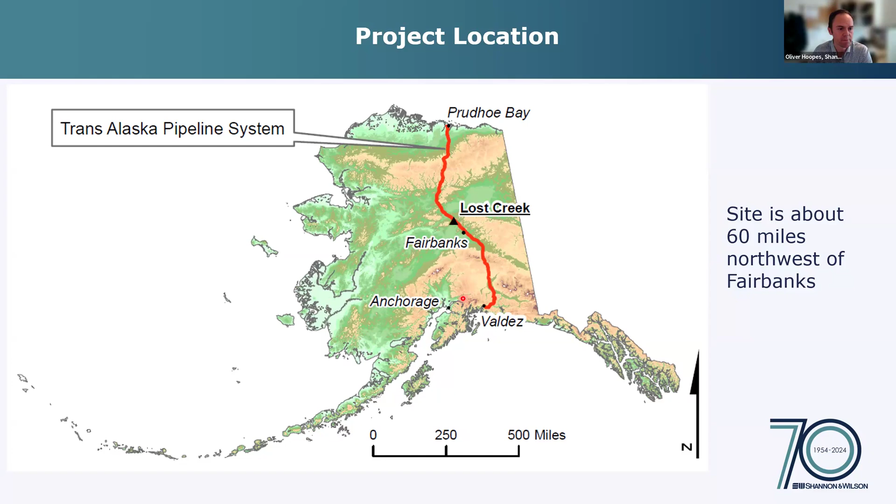Just a really quick overview of TAPS. Most of you probably know this, but I'll summarize it anyway. It's an 800-mile pipeline. It goes from Prudhoe Bay, the very north of Alaska, down to Valdez. About 420 miles of the pipeline is above ground and 380 is buried. It's a 48-inch diameter pipe, and there are about 78,000 above-ground pipe supports, or vertical support members, which is the term used for those.

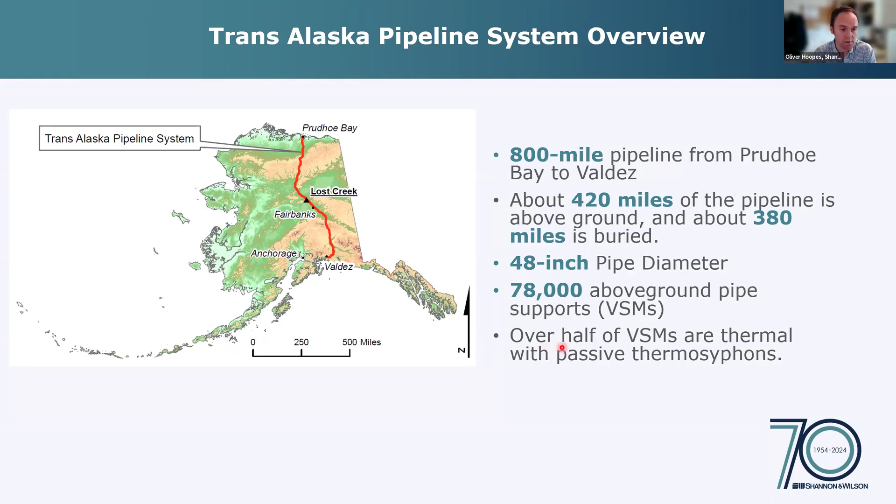Over half of the VSMs are thermal, so they have passive thermosiphons in them. Here's the site. It is a west-facing slope, with north going off approximately in this direction. When they originally constructed this, they achieved their grade for the pipe by doing a big cut up here at the top of the slope and then using that material to fill an embankment down at the base of the slope here.

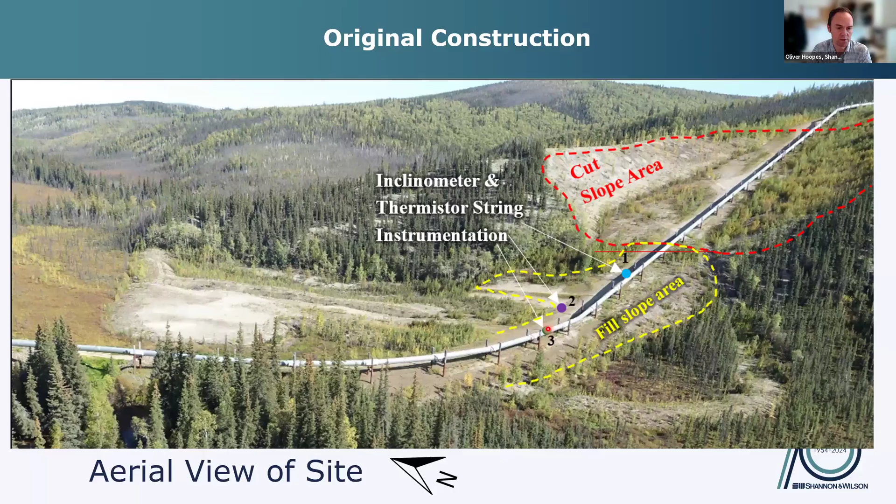For reference, there are three clusters of instrumentation - inclinometers and thermistor strings, primarily - and I'll be referencing these for a lot of the presentation. So that's where they are.

Okay, so the problem statement. When they constructed this, it was in the winter. They filled over this area down here, and it turned out that that was a peat bog. So it was frozen, which held up during construction, but ever since then it's been gradually warming and thawing.

A shear zone has developed in the frozen peat and the slope fill, and it started moving shortly after construction. Slope movements have been exacerbated by permafrost warming. The real consequence of that slow, creeping movement is that the pipe supports are starting to tilt, and if they tilt too much, it becomes very hard to maintain them.

After about 3 degrees of tilt, it becomes a problem. These vectors are tilt magnitude vectors, and the size of the arrows corresponds to the amount of tilt. You can see that a lot of the VSMs were tilting down towards the creek pretty excessively and pretty uniformly down here, at least. We also had some shoulder rotation along this southern slope, the southern part of the fill slope here. It's kind of more like settlement than shoulder rotation, but it looks like effectively shoulder rotation when you're out there. So those are the two main problems that needed to be addressed.

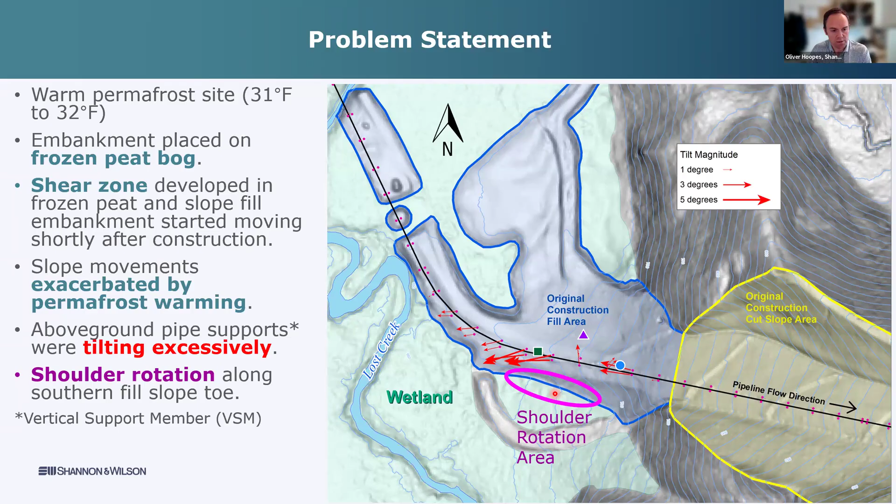Okay, so here's a geologic cross section through the slope. This one on the left is along the pipeline. The one on the right is a transverse cross section down here where the peat is the thickest.

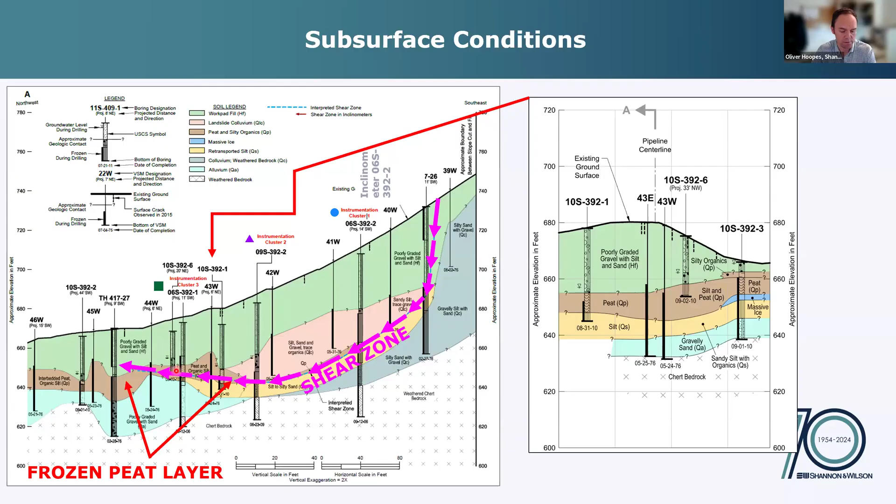The frozen peat layer is this brown material, and here's where the shear zone was identified based on inclinometers that we have throughout the slope.

We have quite a few borings out here, so we have a good bit of lab data that we had to play with for preparing soil properties, and as you can see, we had pretty variable water contents. This is a log scale here.

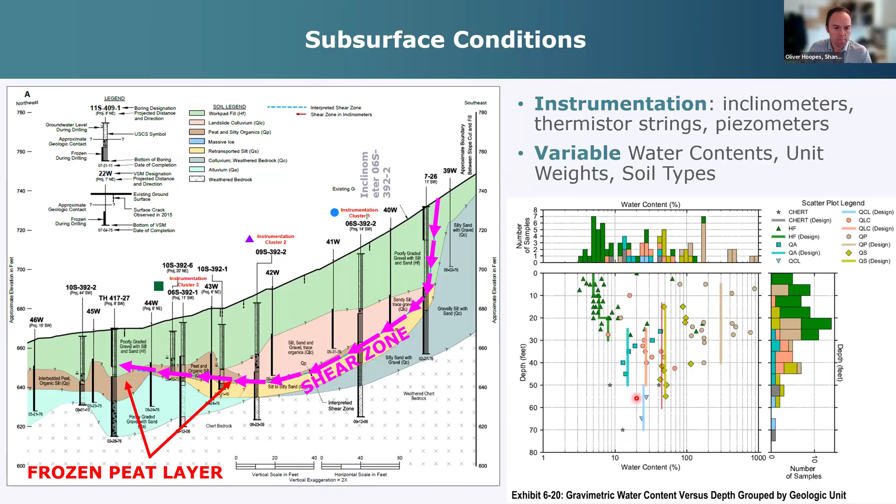In those instrumentation clusters, they were measuring fairly uniform displacement rates at about a half an inch per year in the shear zones. That's what this plot shows. Our measurement started in about 2006, and then some more instruments got added later.

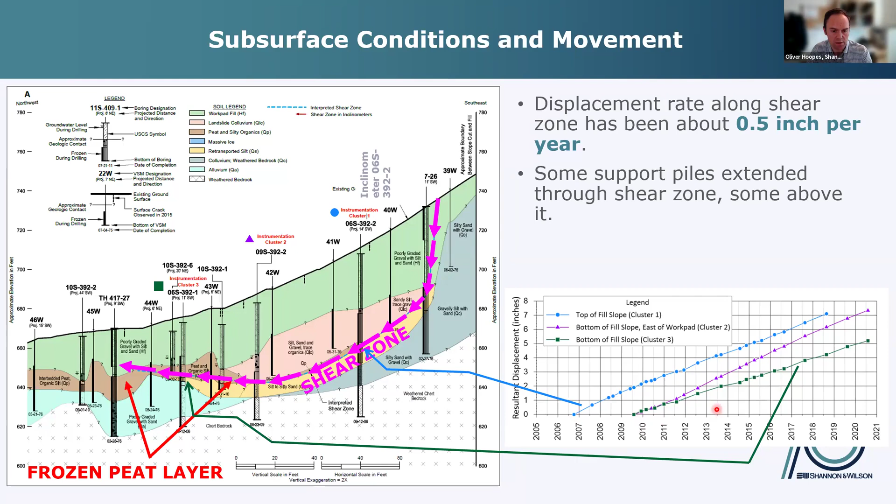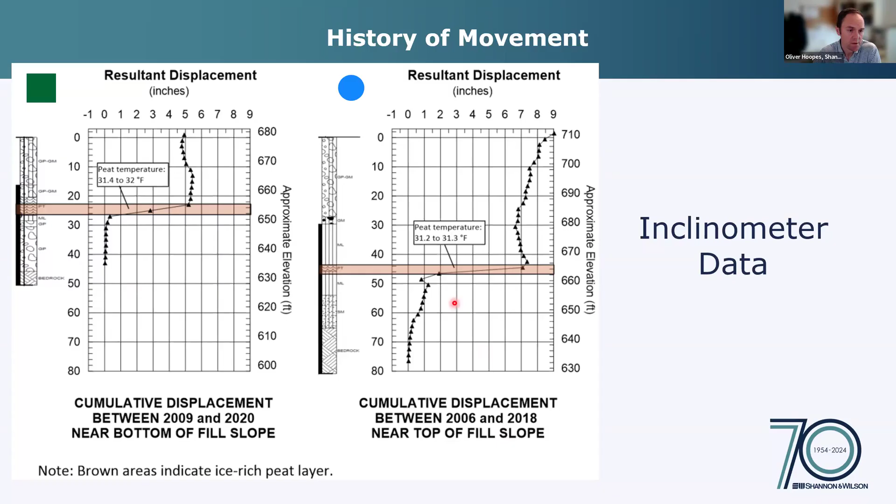Diving into the inclinometer data a bit more, these plots show the cumulative displacement between 2009 and 2020 near the bottom of the slope. We see we have about 5 inches during that time. This other cluster goes from 2006 to 2018, and we got about 7 or 8 inches during that time.

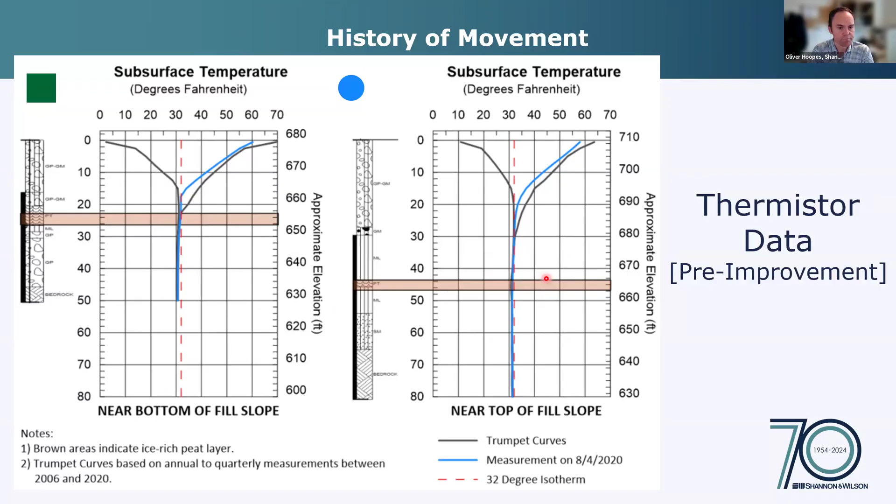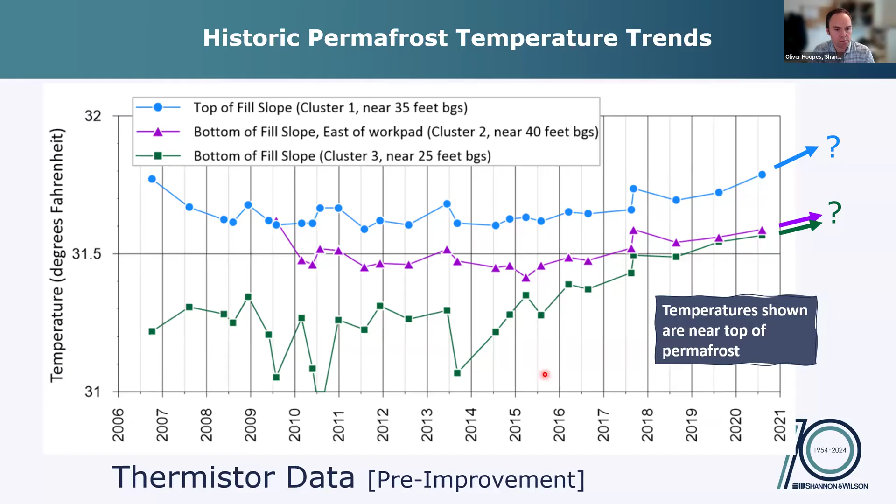Another view of the thermistor data. This data is for the top of the permafrost. So we're looking at the temperatures near the top of the permafrost with time, and you can see a gradual trend upward here, especially near the end here, after 2015 or so, 2018 or so, it starts to keep going up, which was not a good thing to see.

Okay, so the design approach. This slide here summarizes the whole design situation. So we have an overall design criteria of 3 degrees of VSM tilt over the design life, and at the time that was 40 more years. So 3 degrees in 40 years, that was a design criteria.

Temperature in the peat, that's the main thing that we could control in order to achieve that. So we had to develop a series of relationships in order to show that reducing the temperature here can let us achieve this.

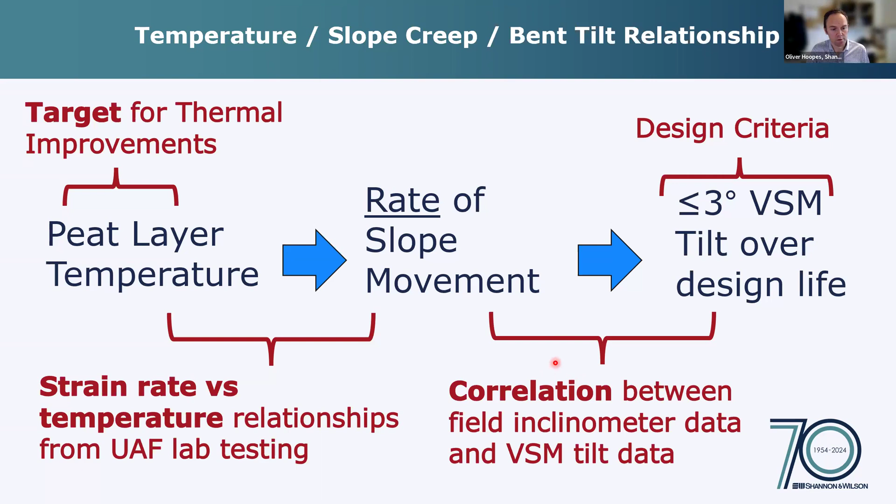So we used strain rate lab testing that the University of Alaska Fairbanks lab did to relate peat temperature and rate of slope movement. And we used the long history of inclinometer and tilt data to correlate those two things together, and then we aggregated all the data and strung together the correlations to make this work in summary.

So our main tool for cooling is freestanding heat pipes or freestanding thermosiphons. And maybe even more importantly, wood chip thermal surface insulation.

I'm sure most of you know how thermosiphons work, but I'll just give a very quick summary. They are completely passive, so they have no moving parts or supply power. Basically, you have a very low boiling point gas working fluid inside this sealed pressure vessel, which is the heat pipe.

And there's a condenser at the top, which are these fins, that allow heat to radiate out, and as that heat gets removed, the working fluid condenses and it falls down to the bottom where it will extract heat, collect heat from the surrounding soil, and then it will boil again, and that process cycles as long as it's cold enough outside.

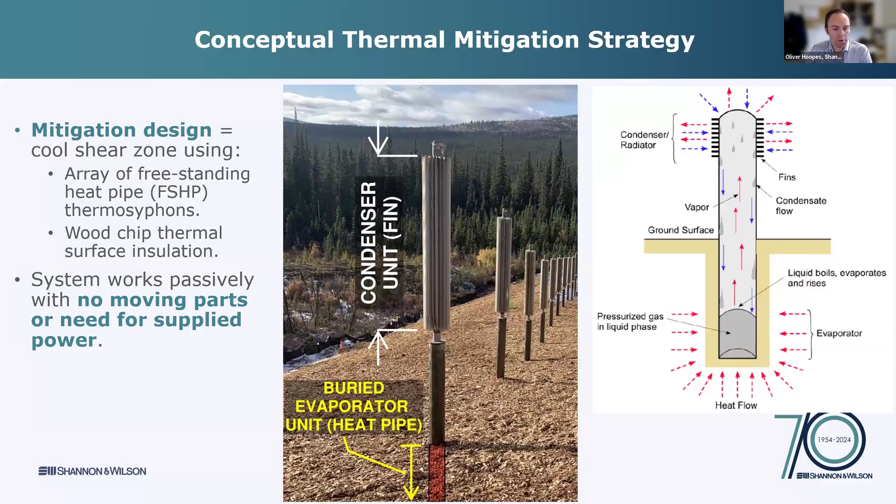Okay, so UAF lab testing - they came out. This is Peppy Croft from Shannon Wilson at the time, out here collecting some high quality samples of frozen peat using their special tool. Here's some nice pictures of the frozen peat from the UAF report.

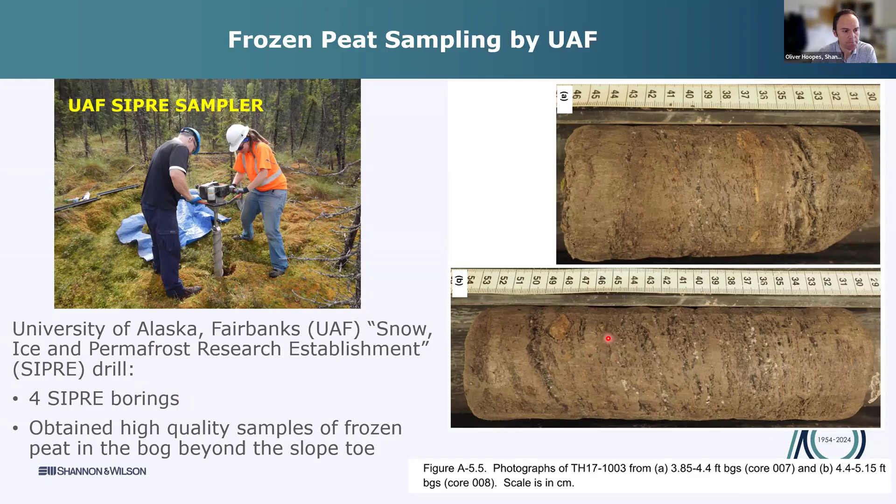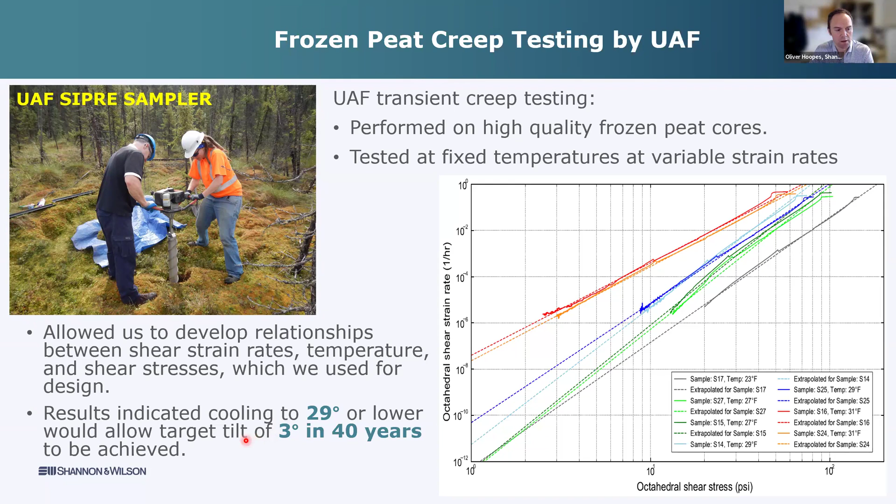So they did transient creep testing on the peat cores. These have fixed temperatures and variable strain rates, and they're able to make these relationships. So this data allowed us to develop relationships between shear strain rates, temperature, and shear stresses, which we use for design. Our analyses showed that if we could cool the peat to 29 degrees or lower, then we would achieve our target tilt of 3 degrees in 40 years. So that 29 degrees, that became our target.

Okay, so thermal modeling.

This site is pretty far from a good, reliable NOAA station. I know there are some PRISM models you can use to look up historic data or make a synthetic record, but we did not go that route at the time. Instead, we decided to come up with a composite air temperature record by piecing together the closest actual data and combining it into one record.

So we have one instrument on site that's active now. It only goes back to, I think, 2008 or so. And then we had a couple of other NOAA sites, and we did end up having to backfill with Fairbanks data.

Our model had a 40-year spin up, so we went from 1980 to 2020 using daily time steps, and we used a 5-day rolling average smoothed temperature data set. That smoothing process helped the convergence quite a bit.

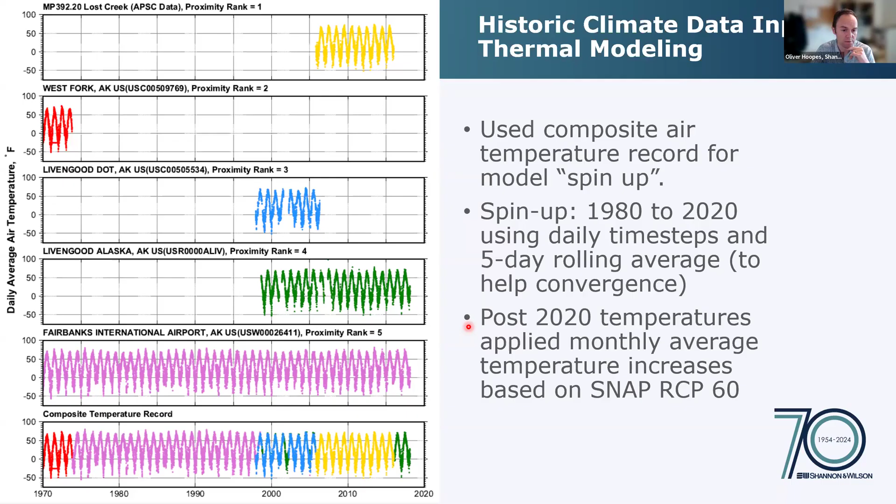And then post-2020, we applied monthly temperature increases based on the SNAP RCP 6.0 scenario. So we had a synthetic temperature sinusoid that we gradually ramped up with time, and we still continued the 1-day time steps using that synthetic sinusoid.

We started the modeling process with a series of 1D calibration analyses at two locations: one at the upper slope and one near the lower slope.

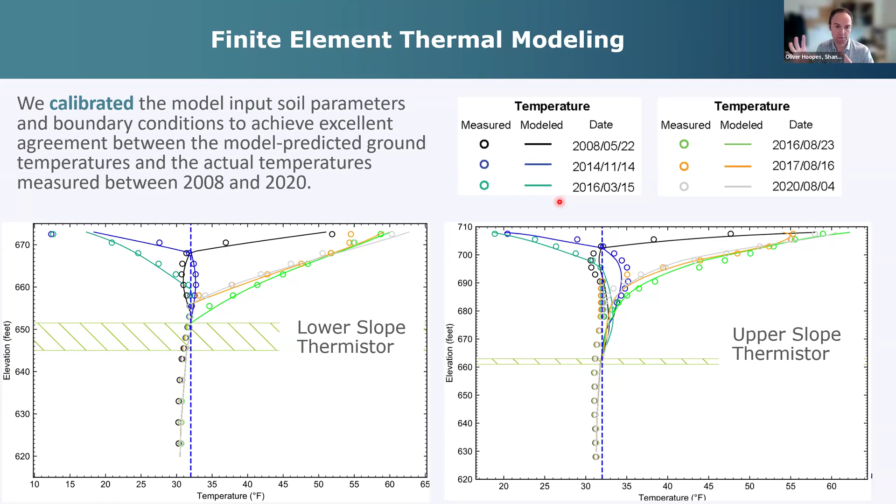This gave us confidence that our soil parameters and boundary conditions and everything was working correctly, and that gave us the confidence to move to the more sophisticated modeling.

In the early part of design, we did not have TEMP/W 3D available to us. So for the preliminary design, we used a combination of plan view analyses, 2D analyses, and axisymmetric simulations.

Right here, what you see is some 2D analyses. We mainly used these to look at the shoulder rotation issue at the toe of the slope. At first we were looking at 5 rows of thermosiphons at a 12-foot square pattern, which is kind of shown here.

We had wood chips, and based on these preliminary 2D analyses, we found that if we tried to end the wood chips at the toe of the slope, the temperatures just wouldn't be enough to keep the slope cool—temperatures were very high near the toe. But if we extended the wood chips out by about 30 more feet, we would get much cooler temperatures at the toe.

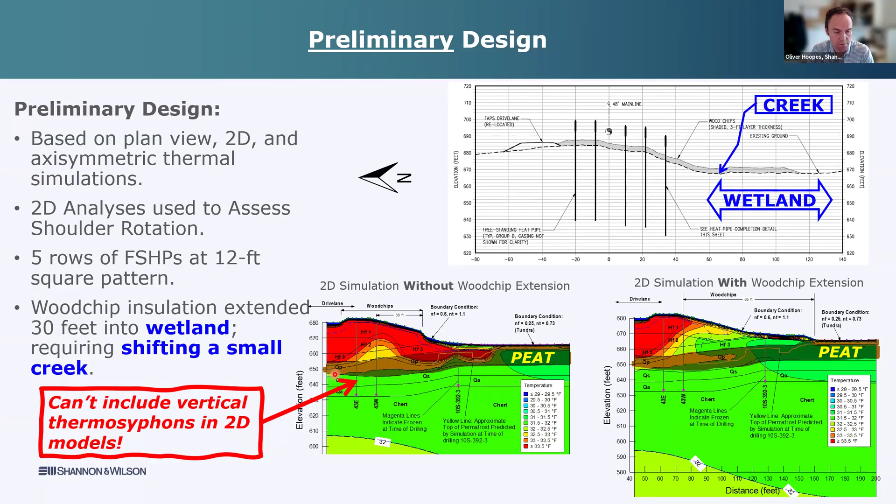As a reminder, with 2D analyses you can't model vertical thermosiphons in 2D—it just geometrically does not work. So to get around that, we did a series of 2D plan view analyses, which were helpful for rapid layout evaluation.

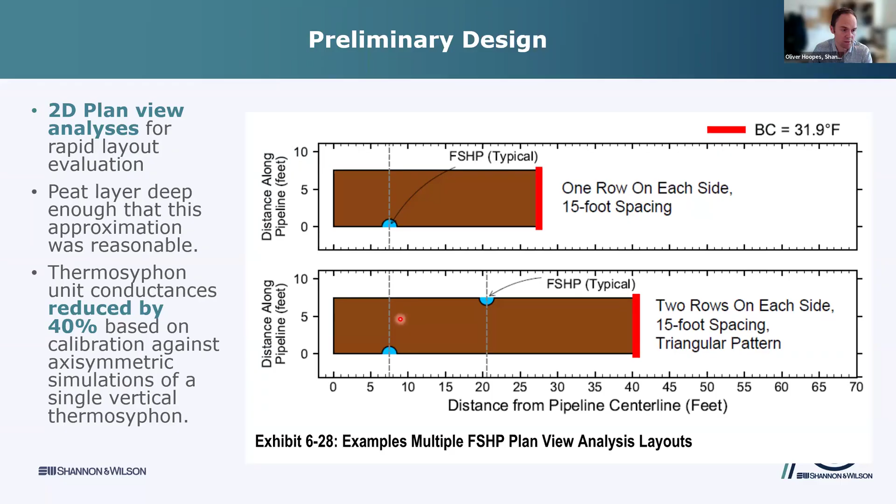The peat layer for this site is deep enough that this plan view approximation was not too bad. But we did end up doing some calibration against axisymmetric simulations, where we modeled the thermosiphon vertically in an axisymmetric cylindrical coordinate system. The result of that calibration convinced us that we need to reduce the thermosiphon conductances, just for the purposes of these 2D models, by 40%, which got them to be roughly equivalent.

TEMP/W 3D became available to us in time for final design, so we developed a 3D model. This is what it looks like.

It's a slice, a transverse slice through the hill. This is the southern toe of the slope in that wetland area. North is in this direction, and right now we're looking downhill in terms of the pipeline.

The width of this model in this direction is the half spacing of the thermosiphons, and the thermosiphons here are modeled—half of them are modeled on this face you can see. Each of the faces are planes of symmetry, so this allowed us to model the entire array.

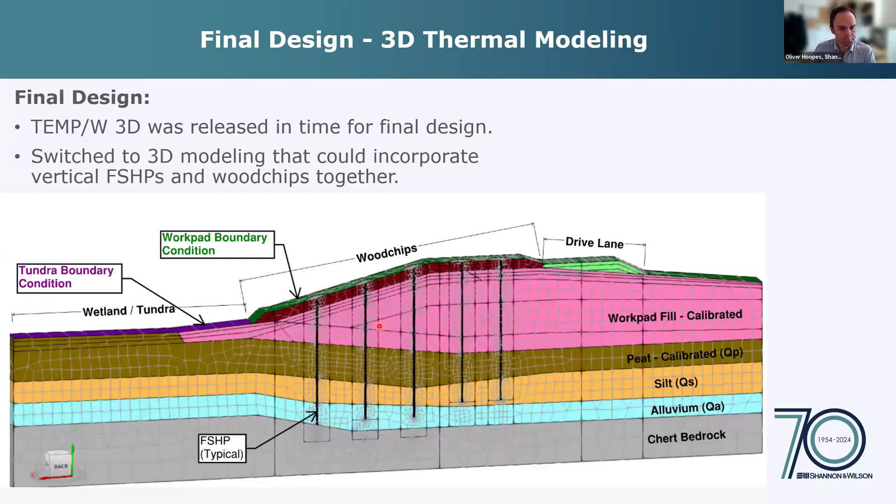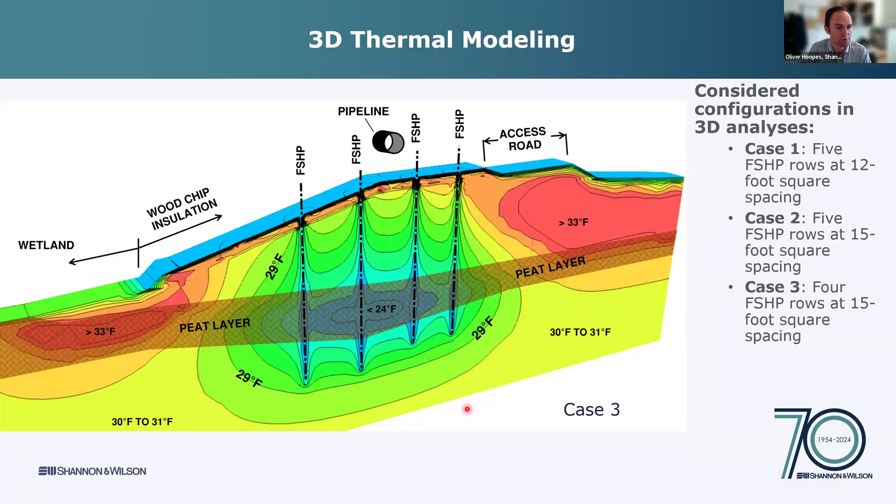So we looked at three main cases for the 3D analysis. Case one: 5 rows of thermosiphons at 12-foot square spacing. Case two: 5 rows at 15-foot square spacing. Case three: 4 rows at 15-foot spacing. This right here is case three, a snapshot of that analysis.

This is a cool little video of the results—I'll let this go a few times. Right here we're seeing the 5 rows, and then now we're seeing the 4 rows.

The light blue, the cyan, that's our 29 degree isotherm, and the dark blue, that's 32 degrees. So the model is showing that we definitely do achieve the 29 degrees and cooler.

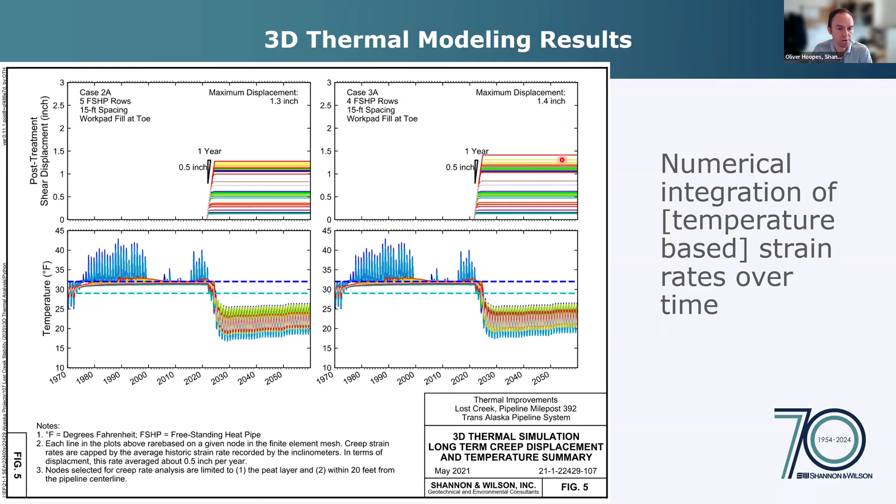So overall conclusions of the model: 4 rows of thermosiphons at the 15-foot spacing is saying that we should achieve all the peat should be less than 32 degrees within 2.7 years, and then all the peat within 20 feet of the center line should be 29 degrees or less within 3.5 years. So that's kind of the time frame that we expected.

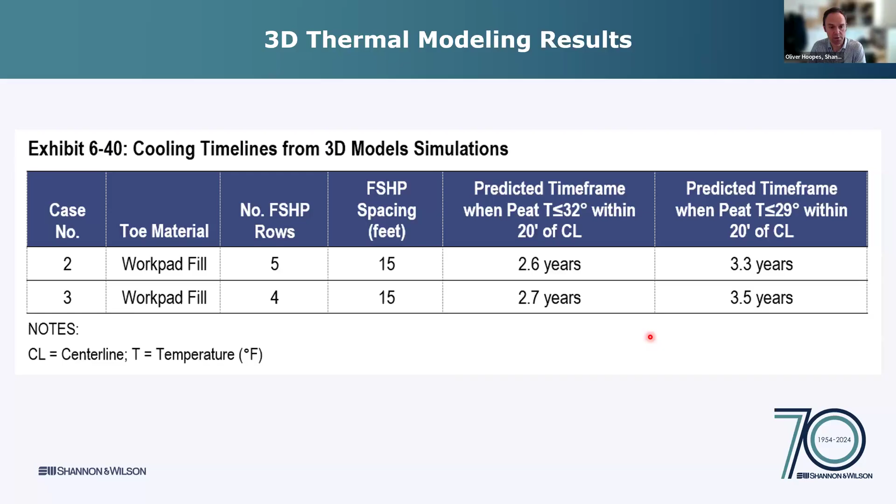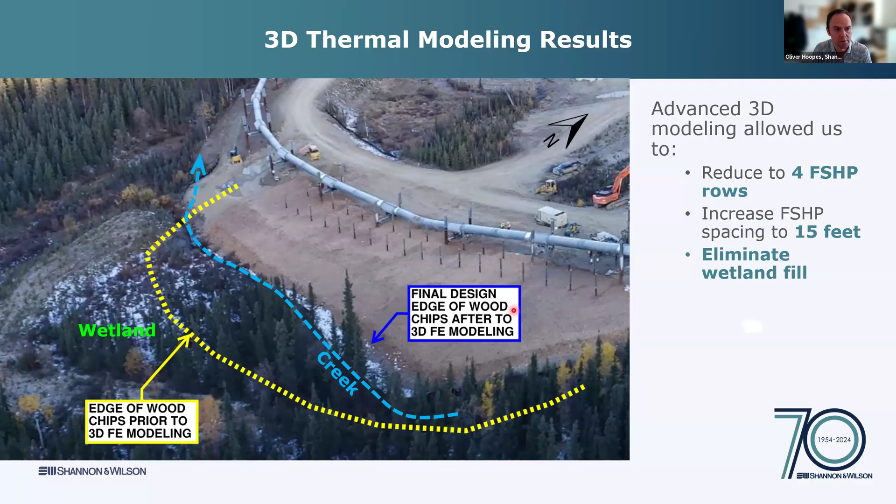Some other benefits - the 3D modeling really helped us. It allowed us to get rid of a bunch of fill, a bunch of wood chips extending into the wetland area here. It meant that we didn't have to try to move this creek. We reduced to 4 rows of thermosiphons and increased the spacing to 15 feet. That all came about by moving to the 3D modeling.

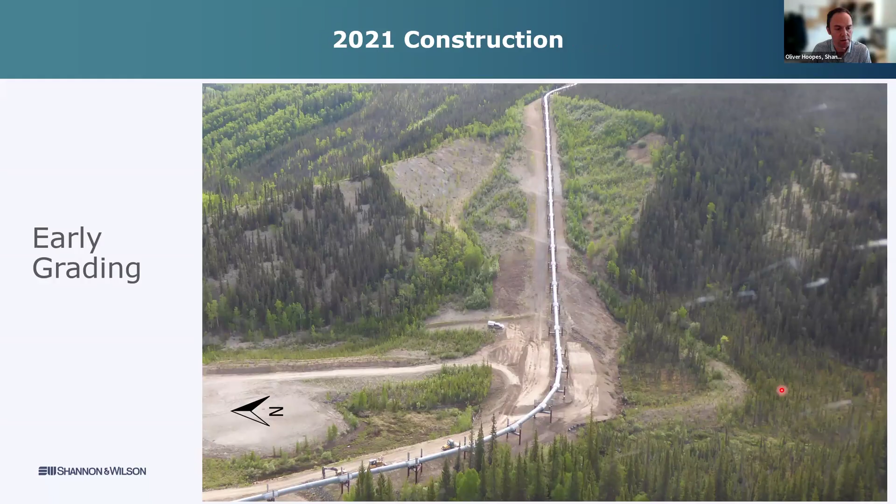All right, construction. Going to go through a bunch of cool pictures. This is an aerial photo during construction, so this is early grading. North is to the left again.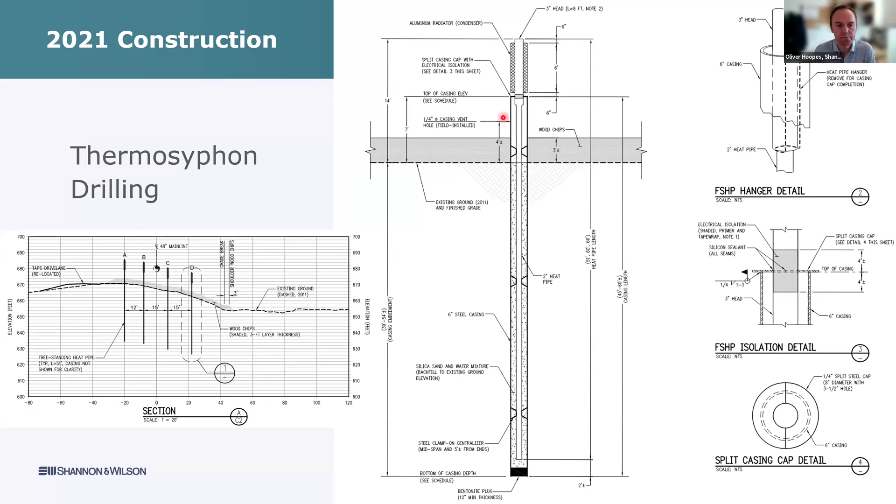Thermosiphon drilling - the way these are installed is they drill a casing into the ground, then lower the thermosiphon pipe down in with some stabilizers, and then backfill it with a silica sand and water mixture, so it's like a sand slurry, and then that freezes - that's how they're installed. So this is one of the drill rigs installing one of them.

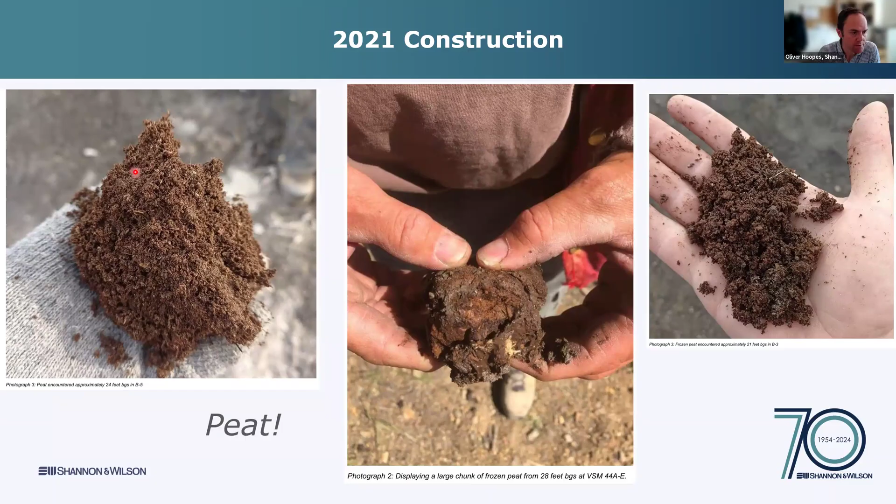We definitely found peat - this is from the drill cuttings. So it is frozen, even though it's kind of hard to tell from the photos that it's frozen, but it is. More casing drilling, colder this time.

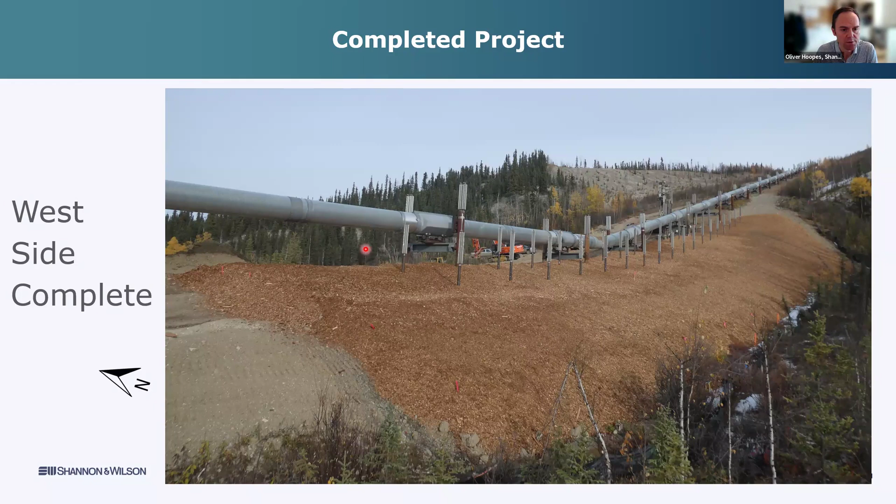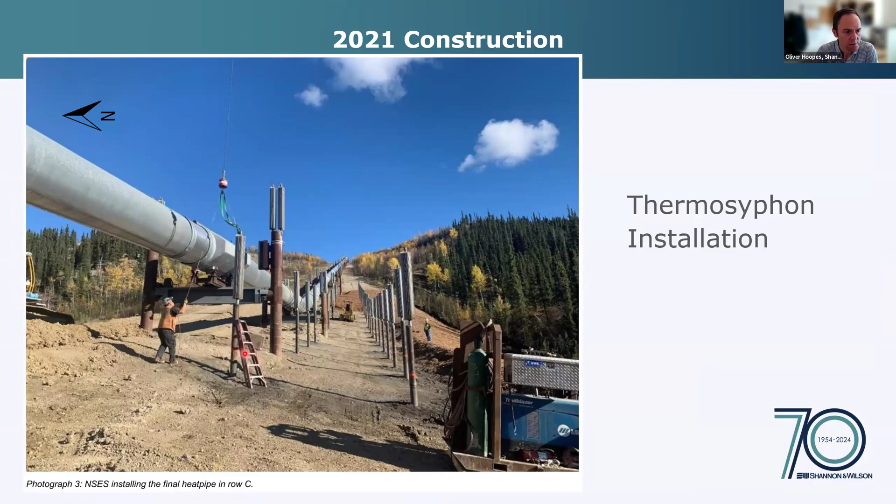Here's the west side that's basically complete. At this time they were still drilling on the east side though. Here's a photo of them lowering a thermosiphon down into one of the casings. They had a crane on site.

Okay, long-term monitoring. We installed 3 new clusters of instrumentation in 2022, shortly after construction. So we have these 3 points right here in the mid span between thermosiphons. We also had this older cluster that we were able to save, so the data from that continued. We weren't able to save the other 2 older clusters.

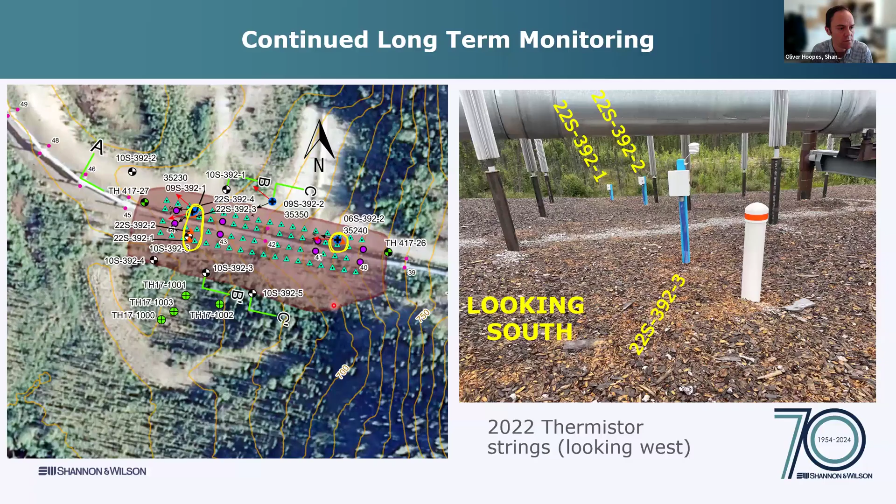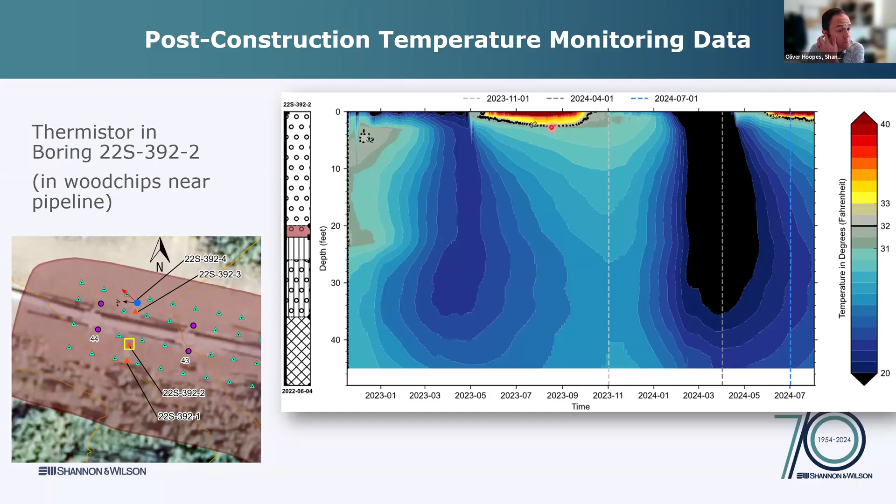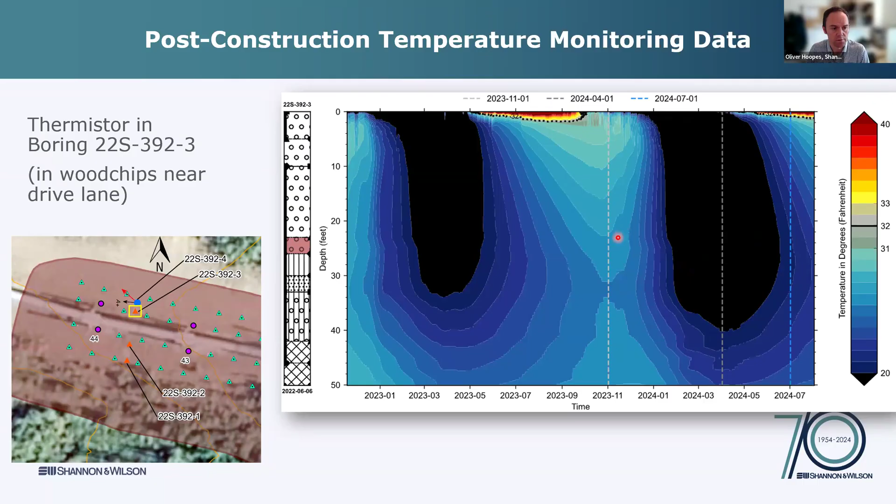Here's the next one over, the second one, closer to the middle of the array. You can see it's getting quite a bit colder with time. Same thing with the active layer - it's pretty shallow. And then this one is the furthest north, and even colder, the coldest one. It's very cold. Okay, so how does this compare to the model?

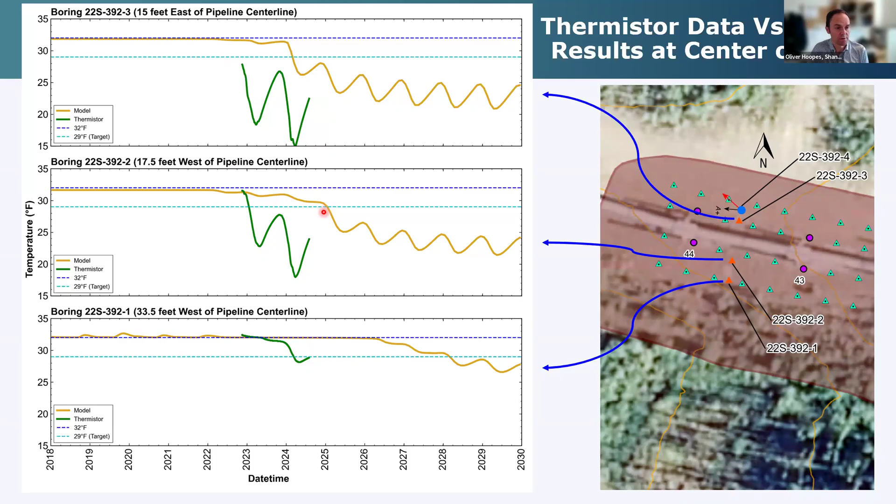We're essentially already there. We've already achieved the target at all three locations. This is our 29-degree target here. So we're 4 years ahead of schedule for this location, 2 years ahead of schedule for the other locations, or thereabouts.

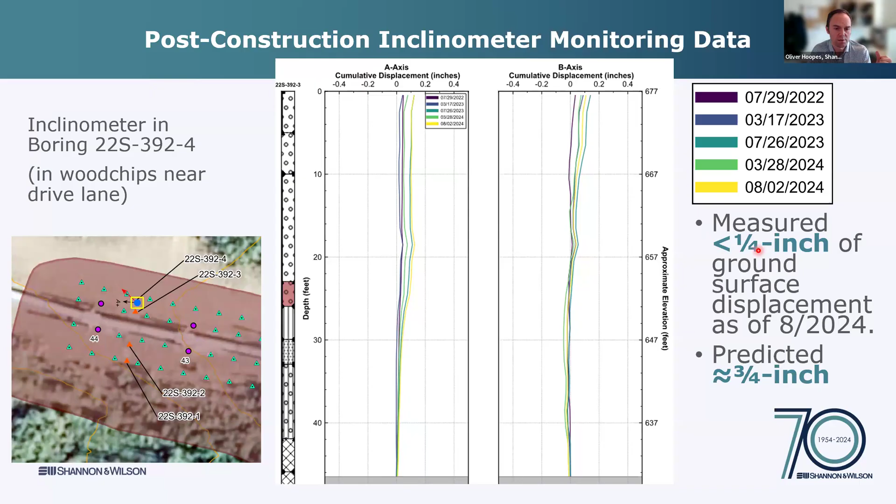We've also got the inclinometer going out there, this guy right here. It's kind of hard to tell the trend. The trend is kind of towards increasing displacements, but it also kind of went a bit and then went back a bit and then went out again. So overall it's still all less than a quarter inch of ground surface displacement.

And just for reference, right about at this point, the model was saying that we should be about three-quarters of an inch. So we're doing better from a displacement perspective as well.

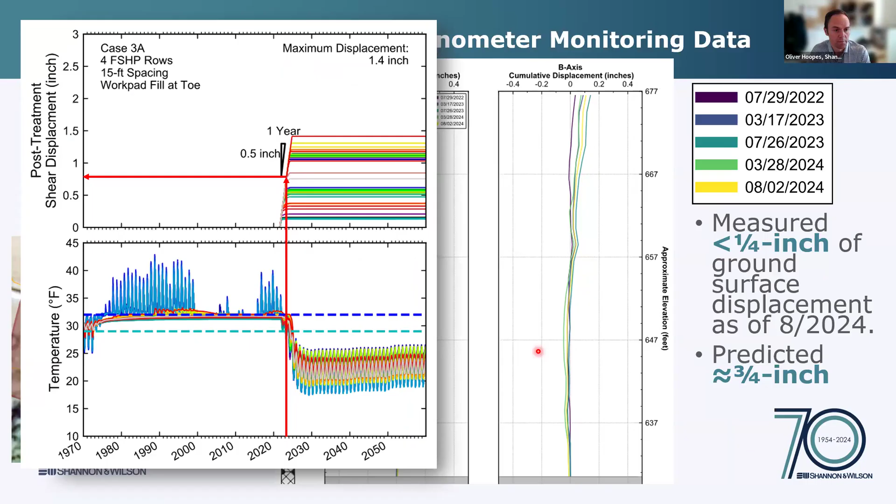As kind of a summary, we used 3D modeling, transient thermal creep testing. We were very proud of how we were able to be environmentally sustainable by nearly eliminating wetland impacts, providing long-term cooling without the need for supplied power or moving parts. We reduced waste by not constructing nearly as much as we would have by going to the 3D. We improved resiliency of TAPS. This was a big risk site that had been on the books for Alyeska for many years, and reducing the risk for the site was huge. And related to all this, we ended up achieving some big cost savings from reducing a bunch of stuff.

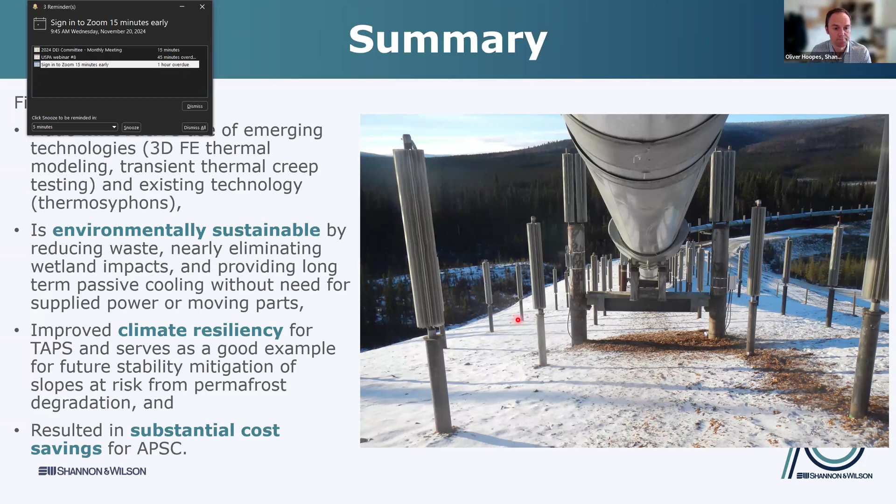So that's it. We have some extra time for questions.

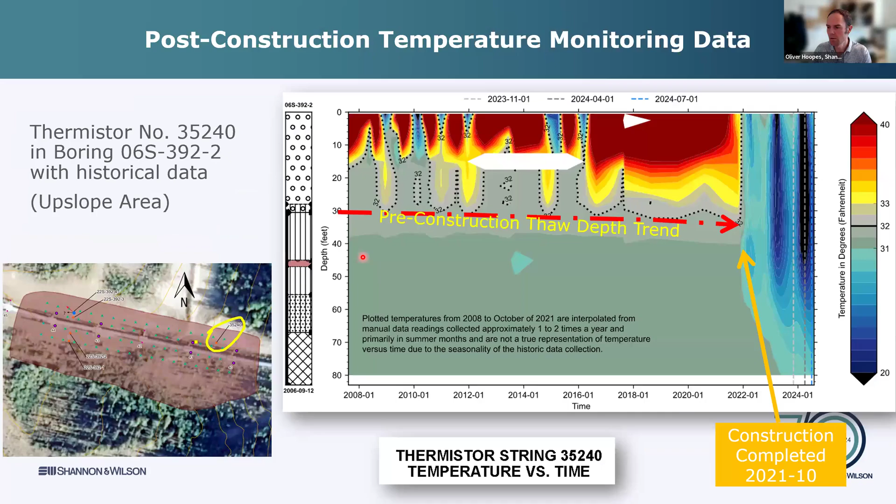See right there. Of course it's pretty deep, so maybe it will not have that much effect on the upper temperature regime, but it may actually be a little bit cooler in the model results. It's not zero flux, it's like the temperature is fixed on the bottom. Yeah, it does look that way. But like I said, maybe it's not that big an effect because it's pretty deep compared to where you're looking for the temperature change.

Well, and second, when you compare what happened in reality for temperature versus what was predicted, you may predict a warmer ground or air temperature, whatever you put into the input model, than it actually was, because it was actually cooler. 21, 22, 23 were relatively cool years. So that may actually make your model prediction a little bit closer to what you measured. Okay, thank you, Vladimir. Chuck, feel free to add, please.

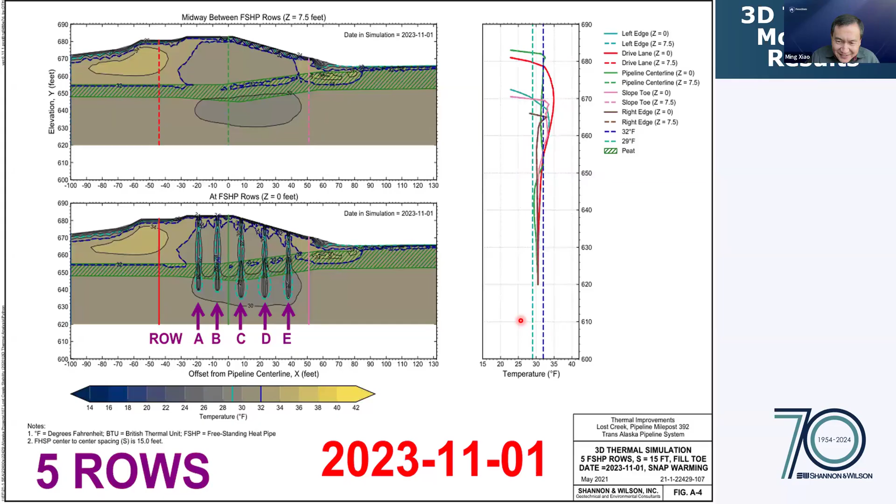Jeff, you're still muted if you're talking. Oh, there you go. Hey, thanks, Oliver, that was a great presentation.

I just have a couple of questions people had. Does rainfall affect it? We're semi-arid, so with the peat layer being as deep as it is, and getting as cold as we are, I guess we wouldn't expect to see a major impact from increased precipitation.

As far as whether we needed to do strain relief in the pipeline, from the pipeline side of things, the pipeline is sitting on shoes that are allowed to move freely on the cross beams, cross members of the supports. We did a project before this to replace the piles that had been pushed over with 40 years of movement, to reset those to vertical essentially. But because the pipe is decoupled from the supports, there isn't a huge amount of strain induced in the pipe from the ground movement, and that was per design.